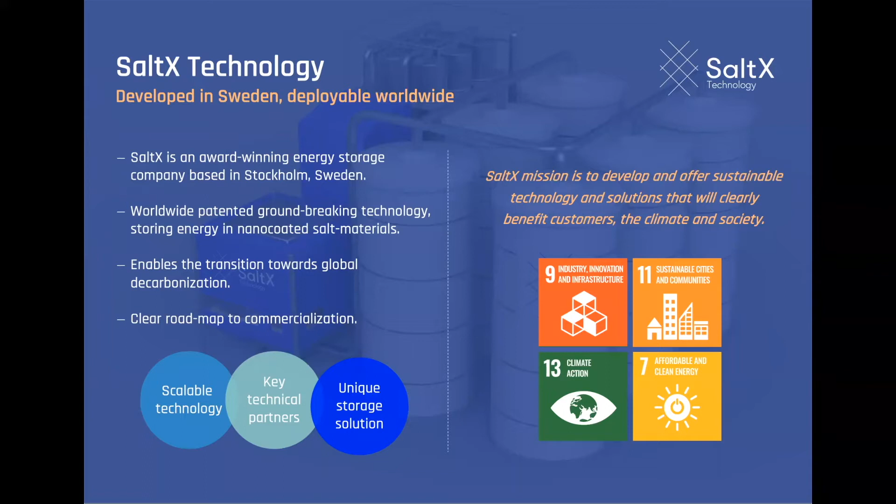It's really motivating us to do what we can to enable the transition to a fossil-free society, because the climate, that's our future. There's no doubt about that. So we will do what we can. We could go back now and see what has happened since the last report.

A lot of things have happened, and some of them we are able to officially tell you, but there's a lot of other things going on also. First of all, we have made an agreement with Luleå Energi and Luleå Kraft in the north of Sweden to build the first of its kind energy storage application, where we're going to use heat to charge the salt. It's actually waste gas that we are going to use to heat the nano-coated salt.

This will be the first of its kind in the world. We have started to plan for it, and we are in a phase where we need to finalize the pilot installation in Stockholm that we are working with at the moment. Stockholm will be the base for the upscaling of the sizes. In Stockholm, we have installed the discharging reactor and the charging reactor is on its way. So we will see the result in short time.

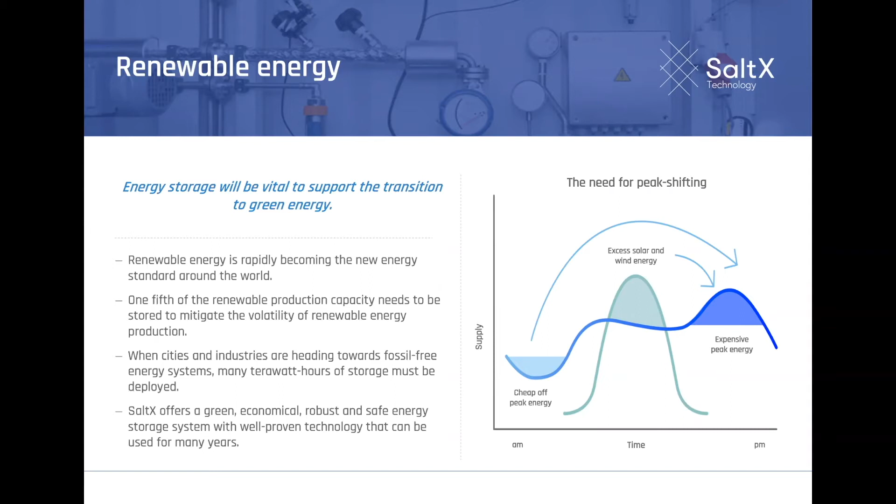The technology that we are using is based on a thermochemical storage process. We start with calcium hydroxide, and we charge it up to 550. We heat it up to 550 degrees by electricity or by heat. And by doing that, you get the chemical process where the steam, the water H2O, will disappear, and the calcium oxide will be left. And that is the powder that we are storing regardless of time, and you have the same energy on day one as you have after 6 months, 7 months.

Once you discharge it, you add 120 degrees steam, and you get a very, very quick chemical process, and you get out 450 degrees Celsius steam, high value steam that could be used in an industry or district heating, or you can also via a turbine make electricity out of it. Of course, with a lower efficiency level, but still you can do that.

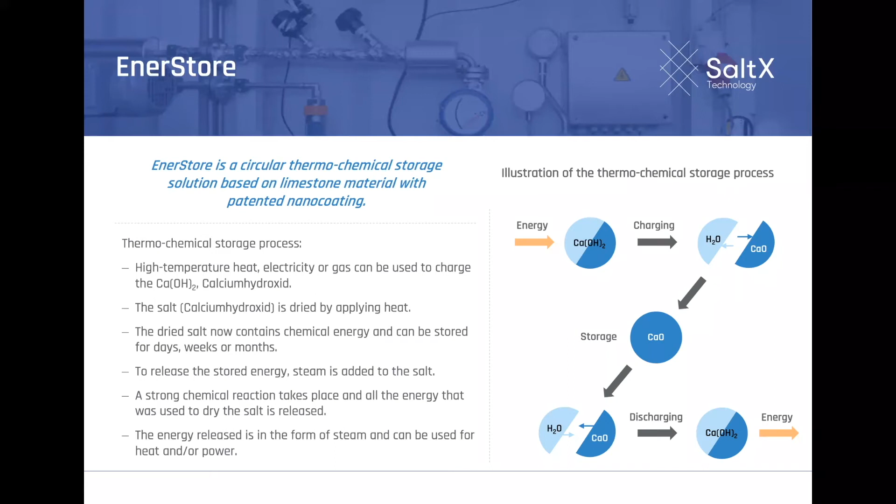We talk about product application, productification of the products, and we are mainly working with 3 areas, 3 applications that are under development. We are in a little bit different stages when it comes to those applications. Heat-to-heat is the Luleå case, as I talked about; it enables the industry to store excess heat energy, and that's precisely what we will be doing in Luleå.

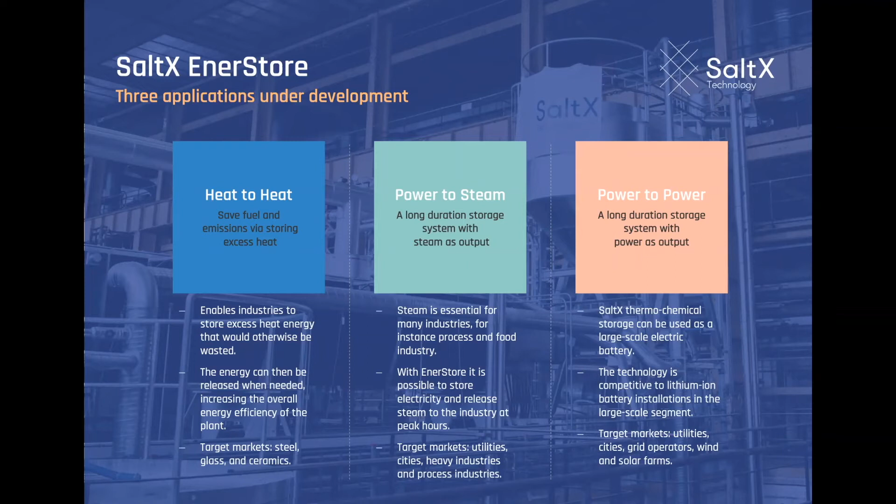So again, this shows that we are working together with some very important partners. When it comes to the charging reactor, we work with an Australian company called Calix Limited, based in Sydney, and they are a very competent company specializing in charging reactors. They call this a falling bed reactor, where you put the material on the top, you do the indirect heating, and you get out the calcium oxide in the bottom, and then you store the calcium oxide in the charged salt.

And then when you're going to discharge it, we use today a true fluidized bed technology in cooperation with a Japanese-owned global company, Sumitomo Foster Wheeler, and they are based in Finland. With both Calix and Sumitomo, we have frequent technical meetings, and we are sitting, so to say, in the same boat, developing and optimizing the reactors in the best way suitable for our nano-coated salt.

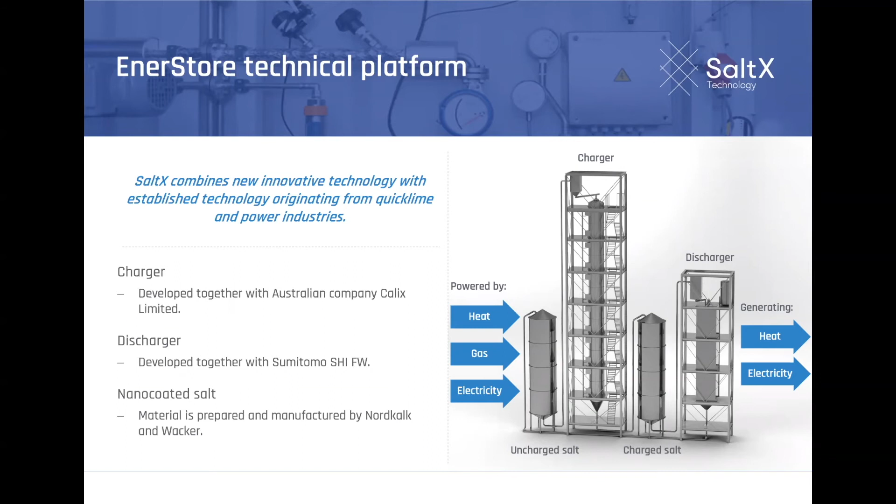The nano-coated salt, again, everyone understands that this is really the base for the whole thing. But when you look at those things, you realize also that the control system, the process system, is very, very important. And once again, then we come to this perfect match, as we think it is, the partnership agreement with ABB. They will support us, and we will start up the cooperation in the very near time to optimize the Luleå installation.

And I'm very pleased with that, because they are a global company and they have a lot of expertise when it comes to large control systems and big industrial sizes, but also that for small entrepreneurial companies like we are, they have decided to support us with this one. So this is a perfect match.

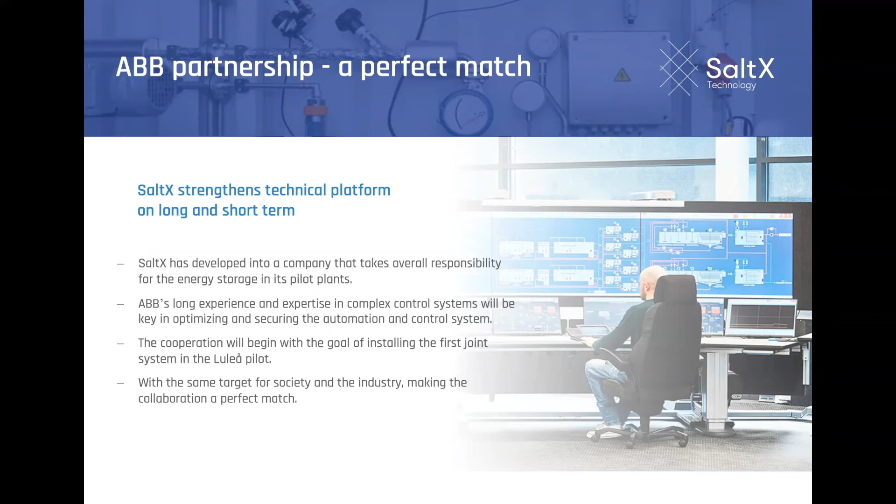So the ecosystem, then, as a summary, it's a living situation, and all the time we have a lot of partners in the background that we want to add on to this picture. But when it comes to the technical platform for the material, it is Nordkalk that's supplying the calcium hydroxide salt, and it is Wacker that supplies the nano coating itself. Nordkalk and Wacker, with our technique, make the recipe for the nano coated salt.

Then the technology, I mentioned ABB and Sumitomo and Calix, they are really the key companies here that are making it possible to make a complete energy storage solution. Once we have the technical platform, we also need application partners to build the storages.

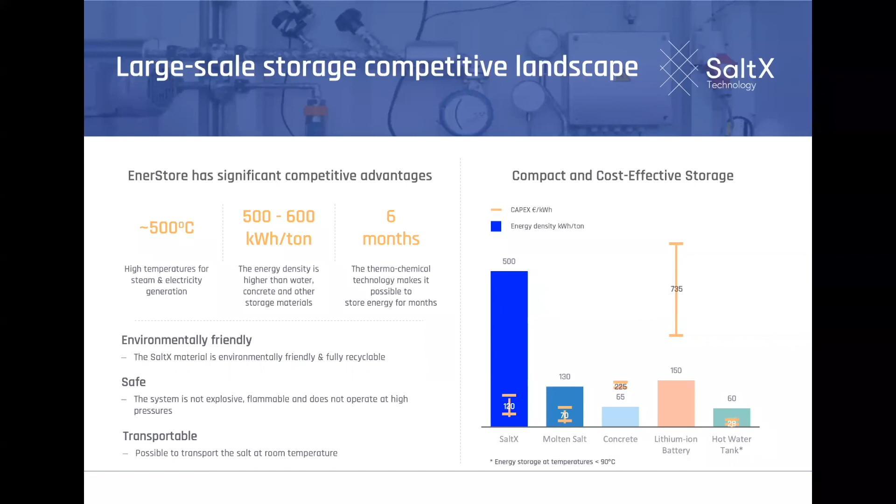Looking on the CapEx side, on the right hand side here, the CapEx for a large energy storage application is 120 euros per kilowatt hour, which is around 1.2 million Swedish krona per megawatt hour. It's a lot of money, but compared to the others, we are competitive, and we think that we have a lot of other advantages versus molten salt and concrete, size-wise, and also in the OpEx operations.

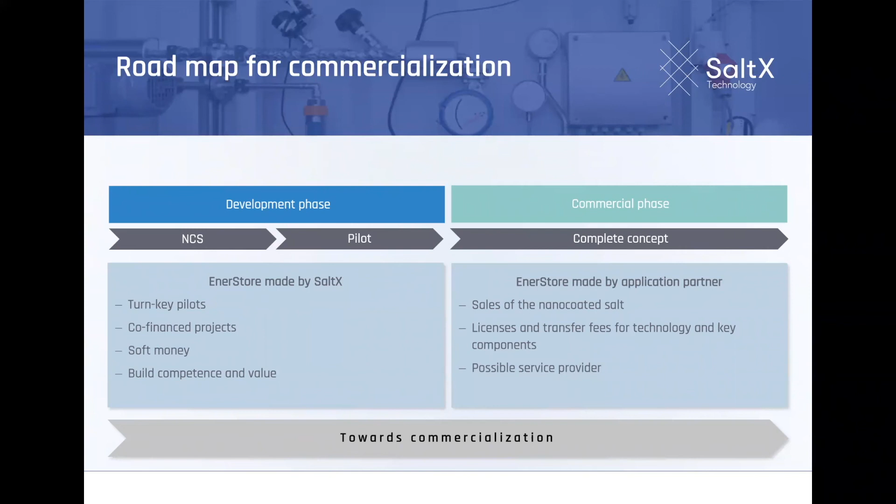Next page. We will continue to build the pre-commercialization pilots in 2023, which is not finalized yet, but we talked to a number of customers here, and we are focusing on the area of 5 megawatt size of charging and discharging reactor, with a capacity of 120 megawatt hours. And they are fairly big, those energy storage applications. But once we have done Stockholm, once we have done Luleå, we are ready to take that step.

But looking at Stockholm compared to Luleå, Luleå is about 10 times bigger than Stockholm. And going from Luleå to the pre-commercialization pilot here is going to be only 5 times bigger, but that's quite a big step anyway. But this is the plan that we have worked out, and by year 2024, the plan is that we will have commercial projects up and running.

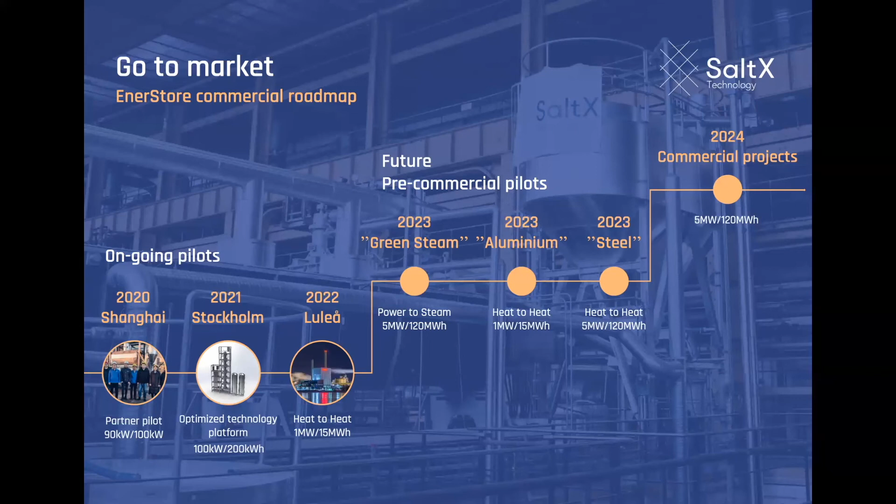So that's number 1. Number 2 is that for part of that investment, as in the past, we are attracting some soft money, some public funding from the State Energy Agency. So part of it is funded, and as we go forward, as Carl-Johan just explained, we hope to increase the part funded by others, both from a soft money point of view as well as from partners and customers going forward.

The third and last comment has already been mentioned, but I'd just like to point it out. The importance of it is that we raised capital in May, this time through a directed issue. It's become rather popular in Sweden to do so-called accelerated book buildings, and we did that. We have a vast spread of investors from a retail point of view, and we now wanted to attract some institutions, and we did so with some success, raised 60 million to the company, which will allow us to go on with our operations for at least a year or so.